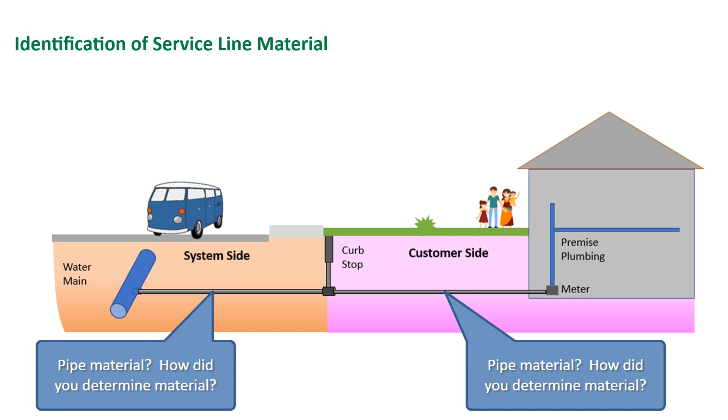Here is a depiction of a typical service line in Pennsylvania with joint ownership between the water system and the customer. When a public water system is building their service line inventory, they are required to identify the service line material and the methods used to determine the material on both the system and customer-owned portions.

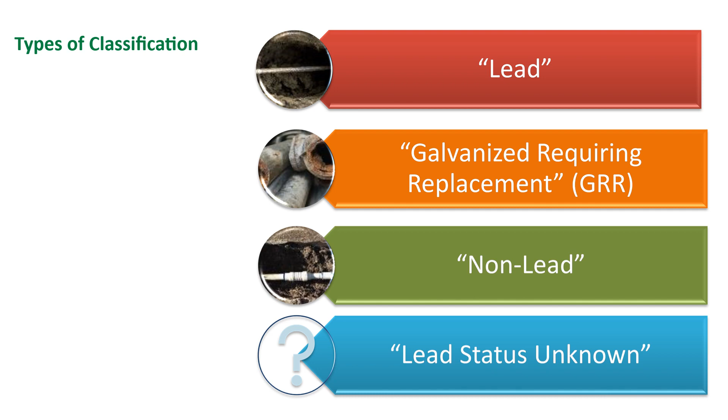Service line materials are classified into four types: lead, galvanized requiring replacement, or GRR for short, non-lead, and lead status unknown. If a public water system classifies a service line as non-lead, such as copper or plastic, the system must prove that it is not lead through sufficient evidence.

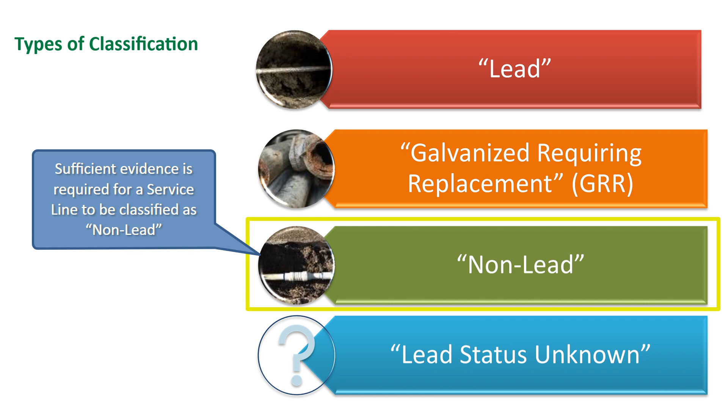There are three different categories of methods for providing sufficient evidence of a non-lead service line. First are the standalone records methods. The next category is the combination of two or more other methods. And the last category are the standalone field methods. Let's look at each one in more detail.

We will start with the standalone records methods. In certain circumstances, a record by itself may be sufficient evidence to determine that a service line is non-lead. In other words, the public water system would not need to combine a records review with another verification method.

If your records show that the service line was installed or replaced after the effective date of the Pennsylvania lead ban, then the records review alone is sufficient evidence. Starting January 6, 1991, the Pennsylvania lead ban went into effect, which required the use of lead-free materials in construction or repair of public water systems.

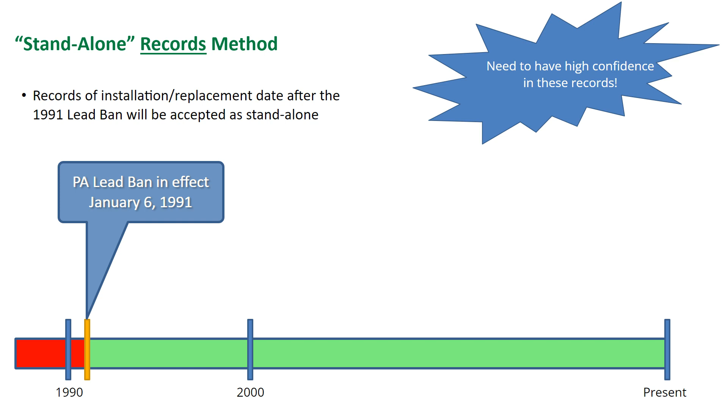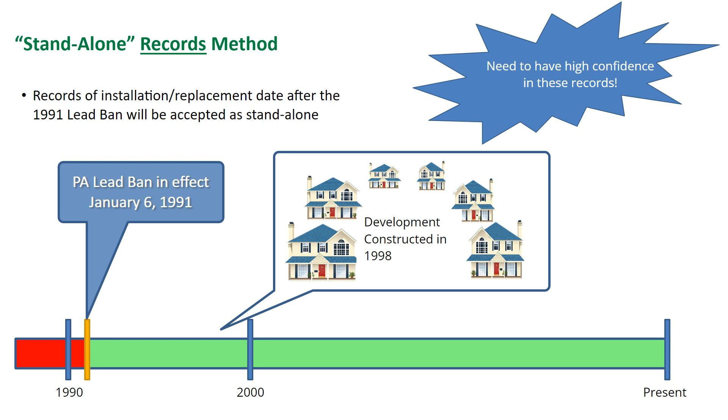In order to use these records for verification, the water system should have high confidence that the records are accurate. An example for this type of record would be where the public water system is serving a housing development which was constructed in 1998. For the service lines in this example neighborhood, the public water system would only need to review the records to show it is non-lead.

Continuing with the standalone records methods, perhaps the public water system or local government had an ordinance or plumbing codes prohibiting the use of lead service lines prior to the 1991 Pennsylvania lead ban. If you have this, plus a record of the service line installation or replacement showing that the date was after the ordinance or code went into effect, then you have sufficient evidence to verify that the service line is non-lead.

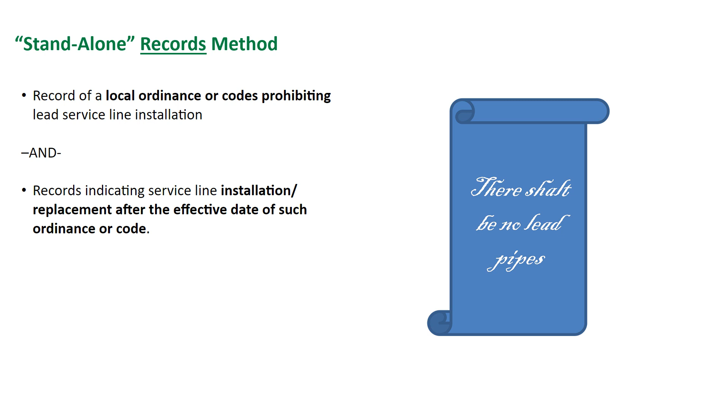Some towns put these ordinances in place in the 70s and 80s when lead started falling out of favor because of health concerns. If the public water system has service lines that do not fall under the standalone records methods, the system can do a combination of two or more identification methods.

The methods that can be combined include records review, field verification, and modeling or statistical analysis. Systems without corrosion control treatment can also use fifth liter or flushed water sampling as a combination method. Finally, there are other methods being developed which are subject to approval from the department.

Any combination of two or more of these methods would be considered sufficient evidence for categorizing a service line as non-lead. For example, a common approach is to combine records review with a field verification method. Pennsylvania DEP's LCRR Service Line Inventory Training Manual, which is linked in this video description, contains more information on modeling, statistical analysis, and the fifth liter water sampling methods.

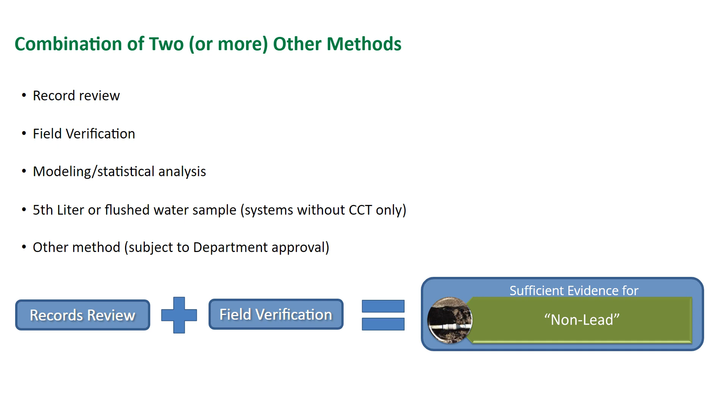In this tutorial, we will look more in depth at the options for field methods when combined with another method. The first option for field verification when combined with another method is a visual inspection at an existing access point on the service line.

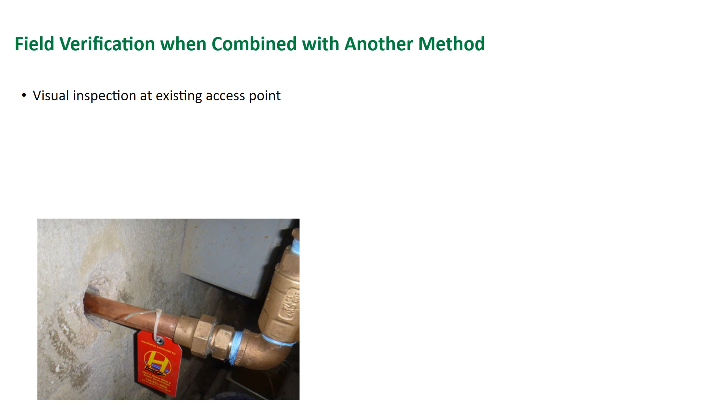This includes inspecting the service line where it enters a building, such as shown here. Please note that if the service line is split ownership, inspecting the line entering the building provides verification of the customer side material, but not the system-owned portion.

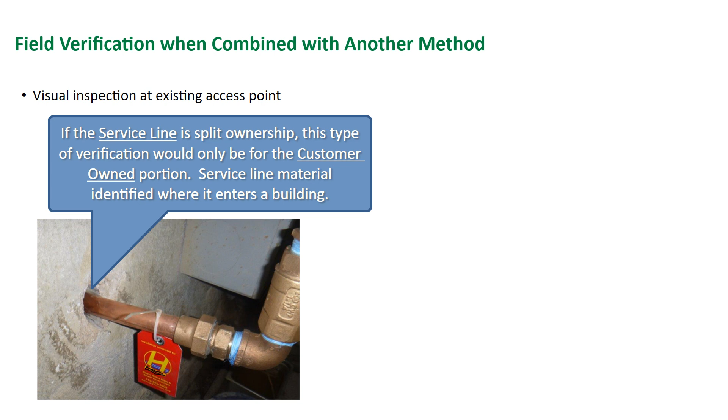If a homeowner refuses access into their home for the water system to view the service line, it is acceptable for the water system to review a photo of the service line provided by the homeowner. The photo must be of good quality so the water system can clearly identify the material type.

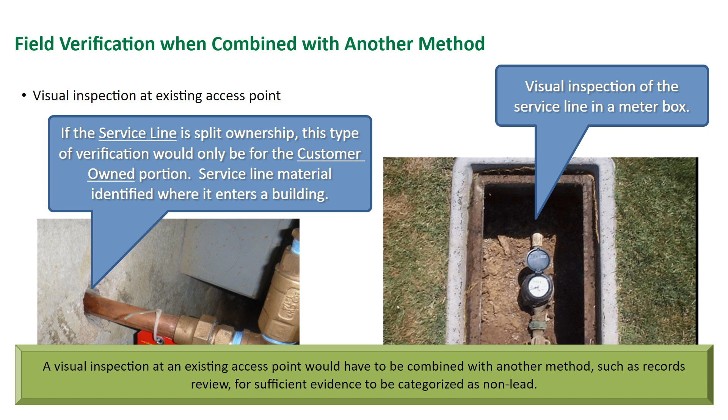Some systems may also be able to perform a visual inspection of the service line material in a meter box or similar access pit. Remember, a visual inspection at an existing access point would have to be combined with another method, such as records review, for sufficient evidence to be categorized as non-lead.

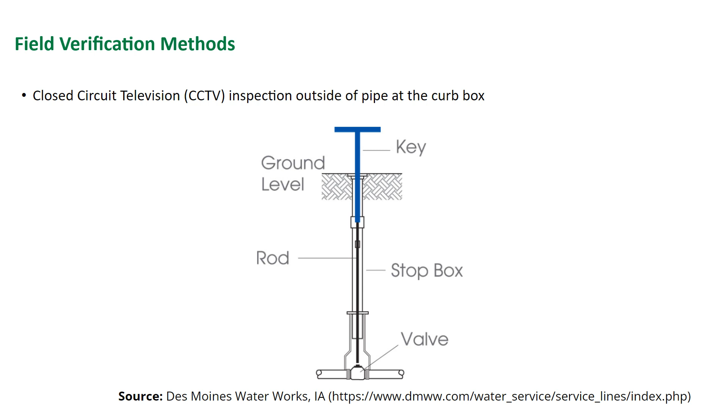The next field verification method that can be used when combined with another method is a closed-circuit television, or CCTV for short, inspection outside of the pipe at the curb box. A small diameter CCTV camera can be inserted through the curb box to view the pipe material on either side of the shutoff valve.

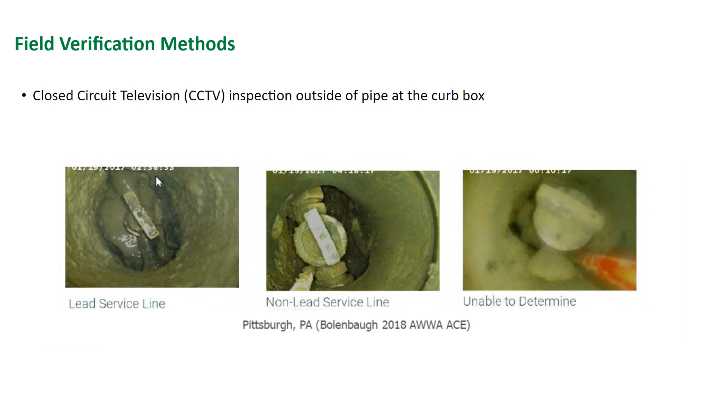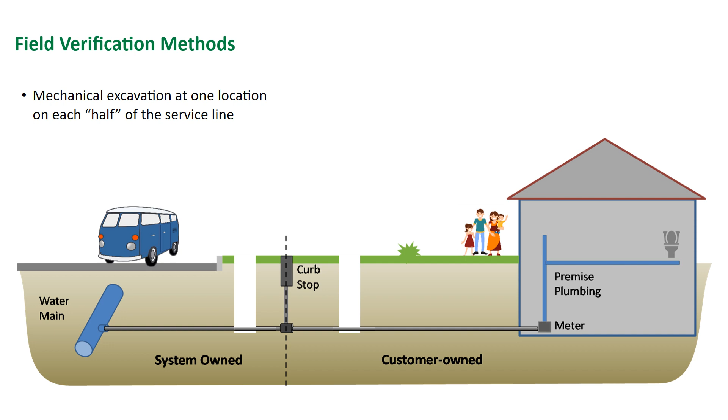Here are a few pictures from the work that the City of Pittsburgh performed for their service line inventory investigation. The last field method option is mechanical excavation, which involves using a backhoe or other device to dig a pothole test pit to expose the service line. Vacuum excavation is also acceptable.

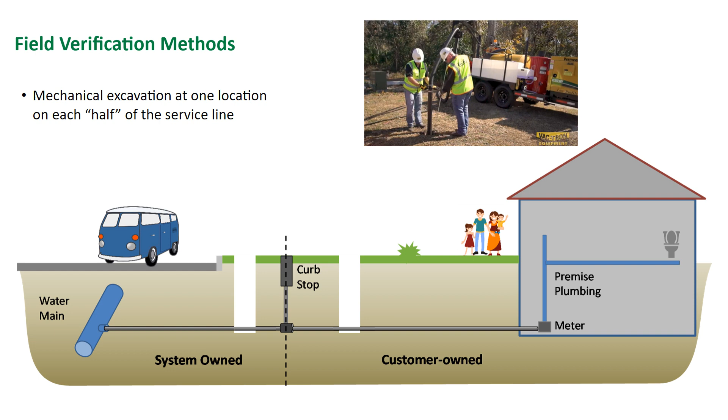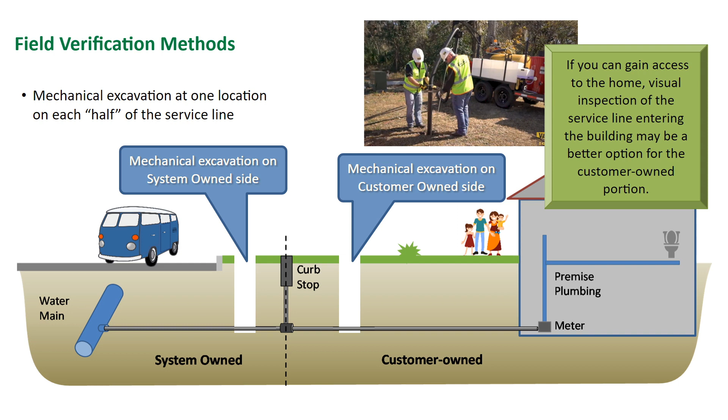When combined with another method, the mechanical excavation method requires one location on each half, the customer side and the system side of the service line. Note that if you can gain access to the home, visual inspection of the service line entering the building may be a better option for the customer-owned portion.

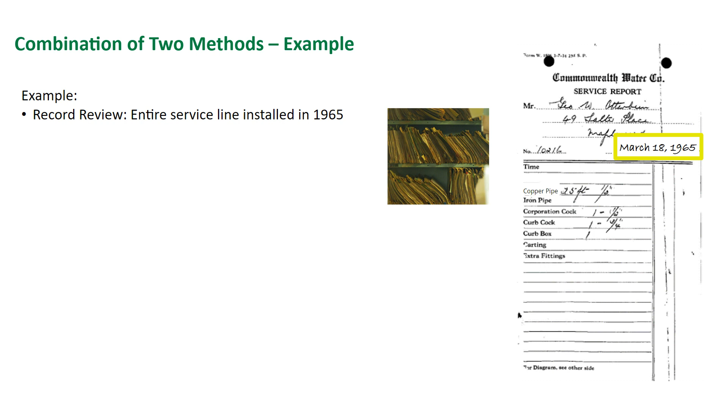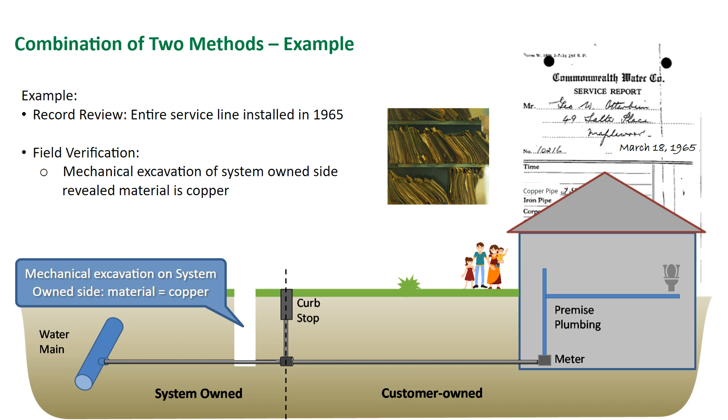Here is an example. A system has records from 1965 showing the material. Since the service line was installed prior to any kind of lead ban, the records review cannot solely be relied upon for sufficient evidence of non-lead. Therefore, in addition to the records review, an additional method is necessary. The system performs a mechanical excavation on the system side of the service line, and they determine that the line is copper.

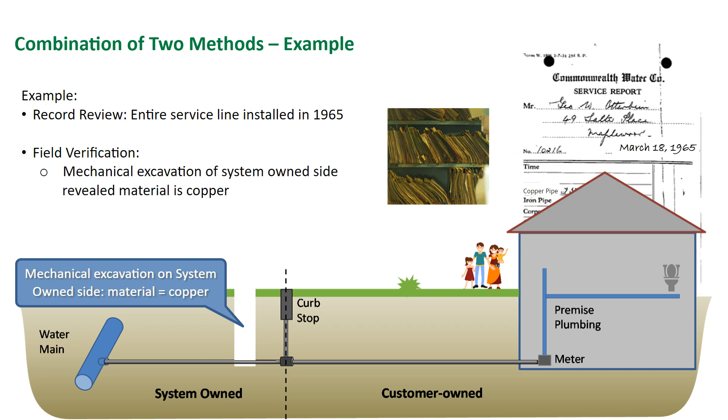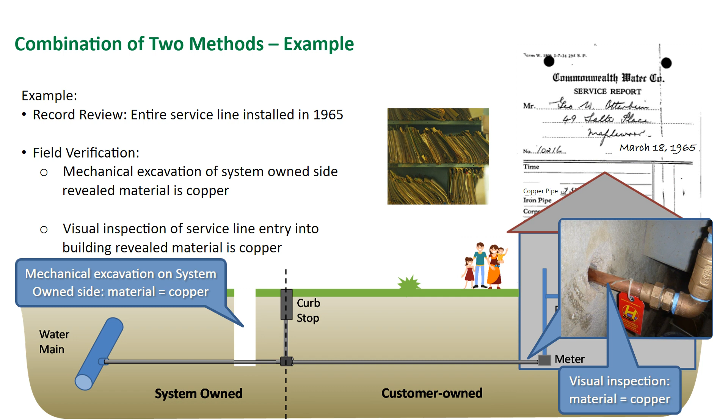The customer-owned portion of the service line still needs to be investigated. The homeowner allows access to the basement to do a visual inspection of the service line entry into the home. The system has identified the material as copper. With these methods, the system has provided sufficient evidence for this service line to be categorized as non-lead.

As you are watching this video, you might be thinking that public water systems will have to perform a lot of field verifications. That is not necessarily the case. Instead, there are certain conditions in which a public water system can do a representative field verification. If the public water system has high confidence in records for an area within their system where those service lines were installed at the same time, such as a residential neighborhood, you can field verify a subset of service lines.

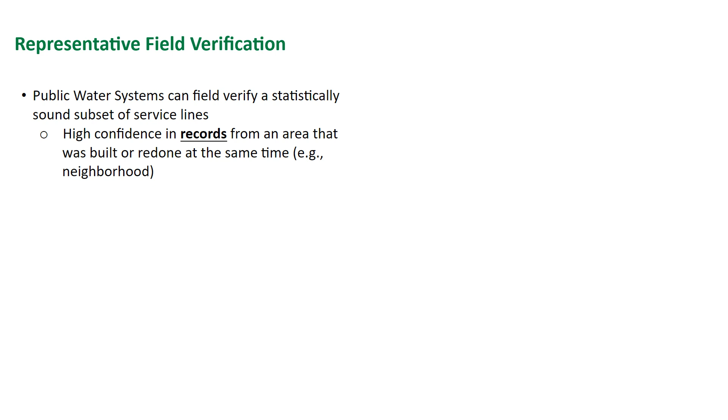To be considered statistically sound, systems should use the Michigan Department of Environment, Great Lakes, and Energy's method for representative verifications. A link to Michigan's guidance document is provided in the video description, and you can also find it by doing an internet search for EGLE service line verification.

As explained in Michigan's guidance document, for an area with less than 1,500 service connections, you have to field verify at least 20% of the service lines in that area. Additionally, the guidance document explains how to randomly choose locations within the 20% to field verify. This representative field verification should only be used when the public water system has records with the service line material identified, and the system has high confidence in the validity of those records.

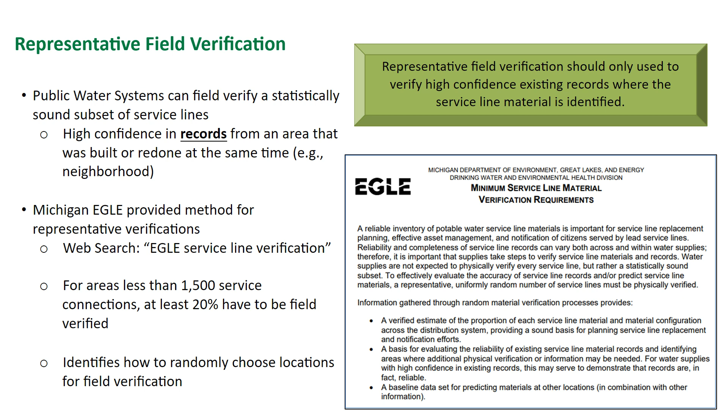For a water system unable to use any of the previous methods and combinations of methods, there are two standalone field methods. First, systems can choose to conduct an internal CCTV inspection of the full pipe length. This method can only be used if the pipe material can be clearly identified from the camera images. The camera should be of high resolution and equipped with a light source. This method is ineffective when the service line is coated with corrosion scale.

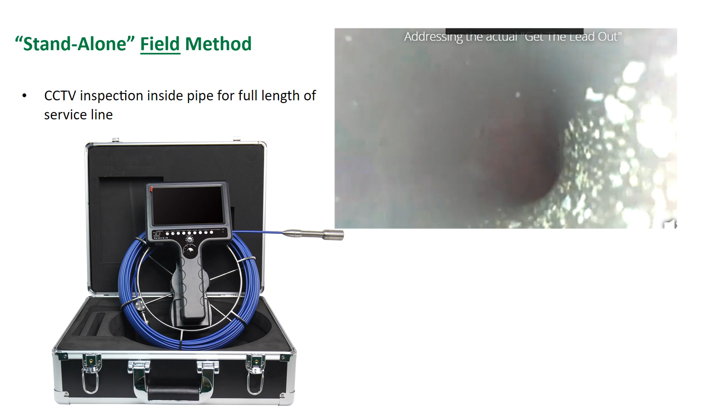Because of the potential scale disturbance in the line, the system should implement risk mitigation measures such as removing and cleaning faucet aerators, flushing, and providing pitcher filters to the affected customers. You can also check DEP's website for additional information on best management practices for systems when conducting internal CCTV inspections.

The other standalone field method is mechanical excavation at 3 or more locations across the length of the service line. Because it is not feasible to excavate the entirety of the service line to view the pipe material, a public water system can choose to mechanically excavate at least 3 points along the service line to identify the material.

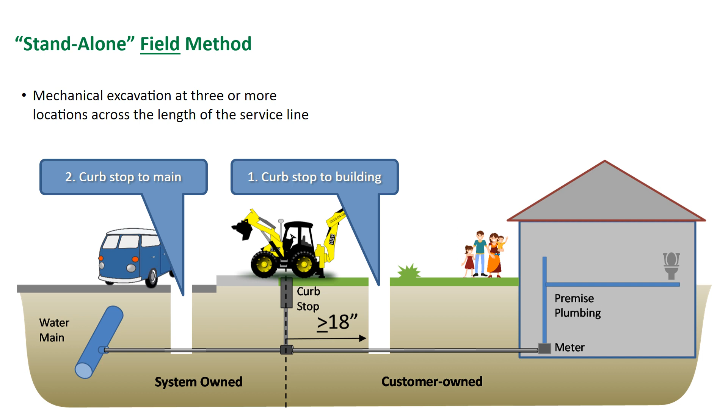These 3 points include a location along the service line between the curb stop and the building, which has to be at least 18 inches away from the curb stop. Another location along the portion of the service line between the curb stop and the water main, which also has to be at least 18 inches from the curb stop.

The third location must be along the longer portion of the service line, which is typically the customer-owned portion. If that is the case, it can be a visual inspection inside the home where the service line enters, or a second mechanical excavation. Just like described earlier, the visual inspection inside the home should be conducted by water system personnel, or a photo taken by the homeowner can be used if it clearly shows the pipe material.

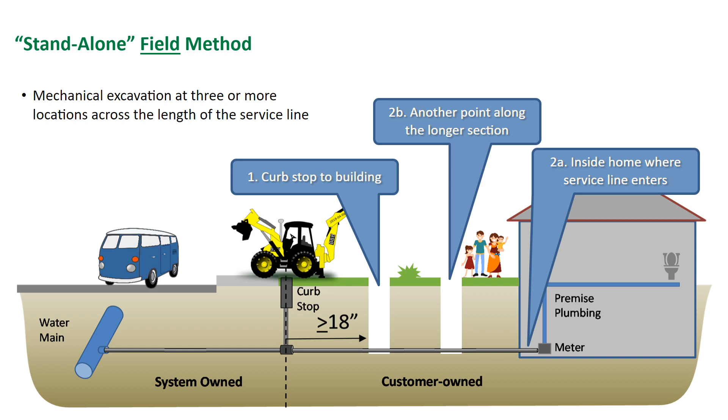Some systems may have records for the system side, but no records on the customer side. Instead of the full 3-point method, these systems can perform a 2-point verification on the customer side. We have now covered all of the current methods to verify that a service line is non-lead.